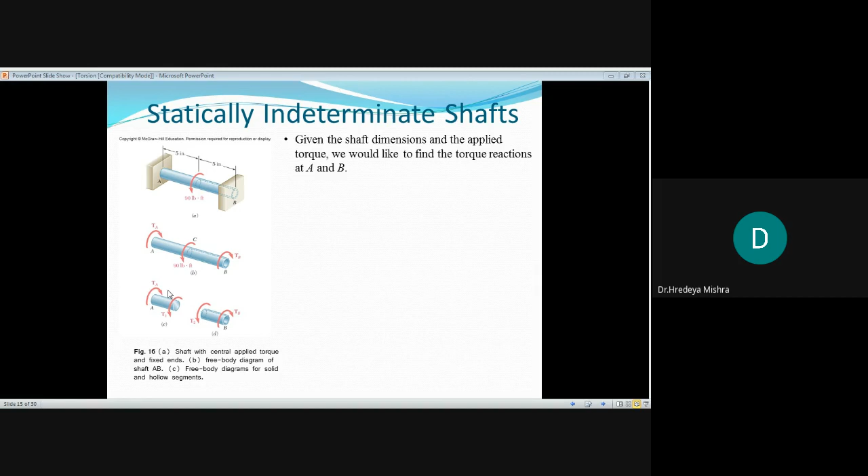Given the shaft dimension and the applied torque, we would like to find the torque reaction at A and B.

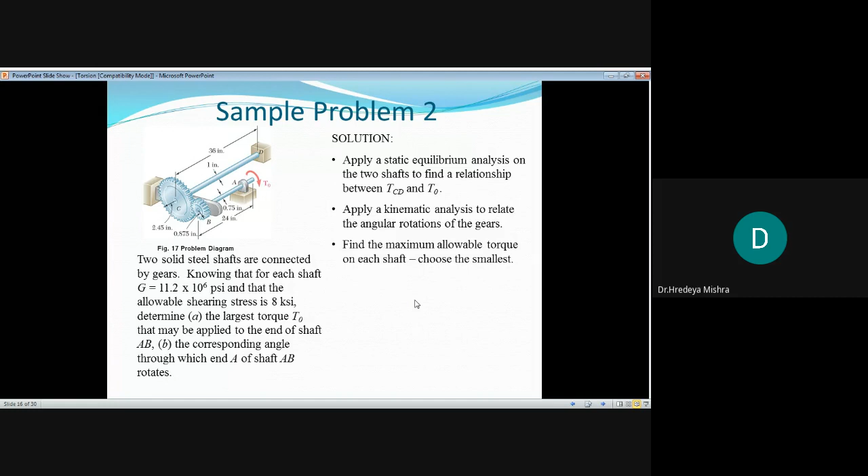Apply a kinematic analysis to relate the angular rotation of the gears. Now find the maximum allowable torque on each shaft and choose the smallest one. Find the corresponding angle of twist for each shaft and the net angular rotation of end A. These are the things.

So we go through these methods to find out the solution for the given problem. Okay, so let's start to solve the problem.

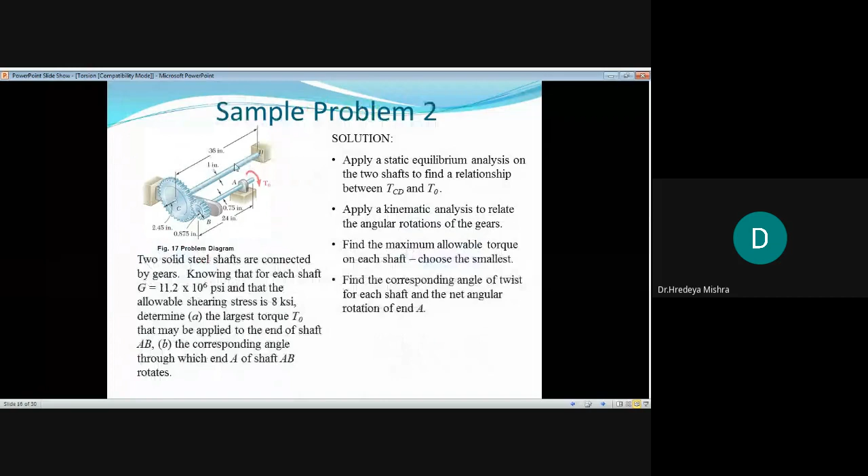Here the solution is: apply a static equilibrium analysis on the two shafts to find out the relationship between TCD and T naught. So this is TCD, see C and D. Whatever torque is produced in this shaft, this is TCD. See here, RC equals 2.45 inch and RB equals

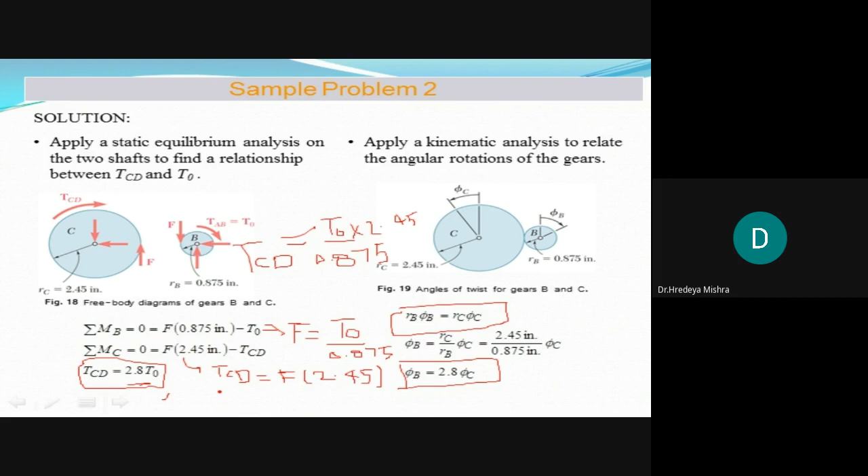2.45 divided by 0.875 is 2.8, so we get 2.8 phi C. This is the relationship between the twist angles of gear C and gear B, and earlier we got the relationship between the torques of gear C and gear B. Now find T naught for the maximum allowable torque on each shaft.